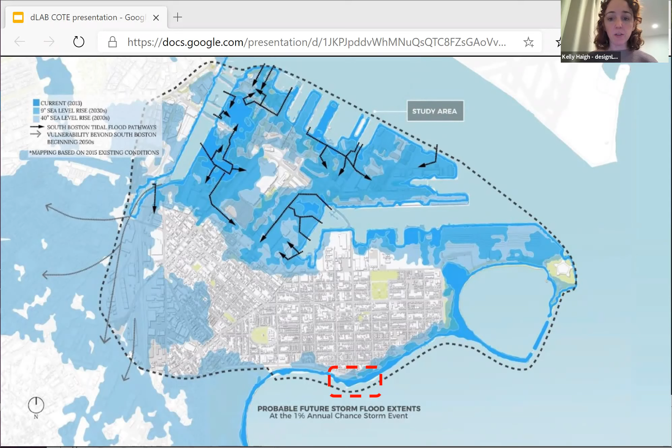So just a quick overview, there was a lot of nuance in starting to deal with resiliency, both the fact that we were right up against the water and also that we had 3 different elevations. So we needed a slightly different strategy at each section of the building. In the end, we did a combination of both wet flood proofing and dry flood proofing, with slightly different targets and technologies along the length of the building.

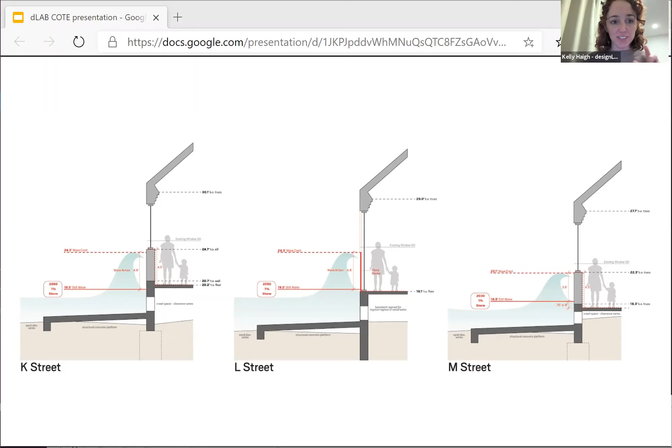And just scaling this out to the section of the building so we can start to see how the sustainable and resiliency goals start to dovetail with other issues like equity and accessibility. We have a section through the building, which you can see originally separated the lobby from the beach through this private gender-separated locker room.

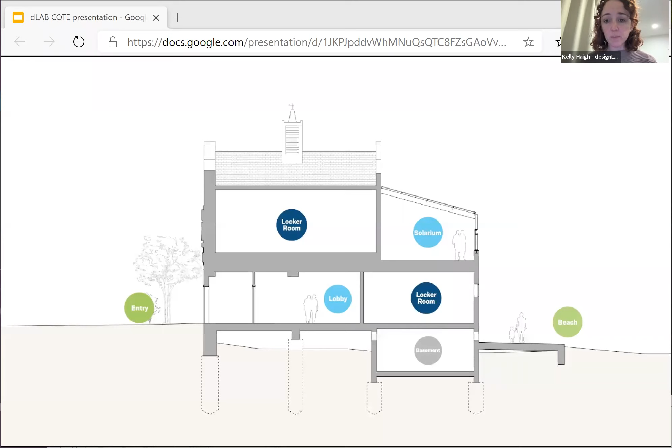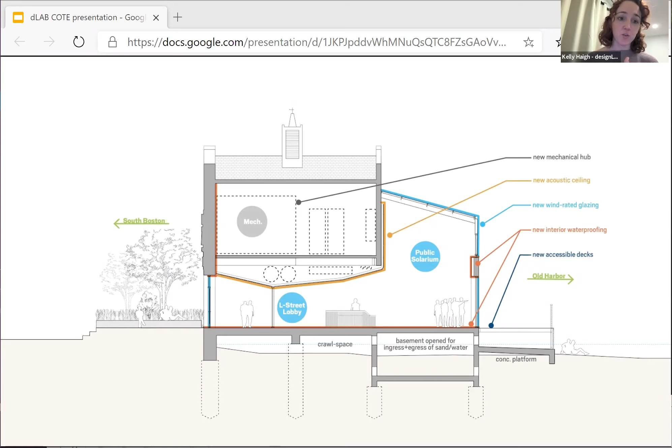Our proposed design, which is currently in construction, moves all the mechanicals up out of the flood zone. It really opens up the lobby all the way to the beach and allows all members of the community, regardless of age or gender, to use the same beaches together.

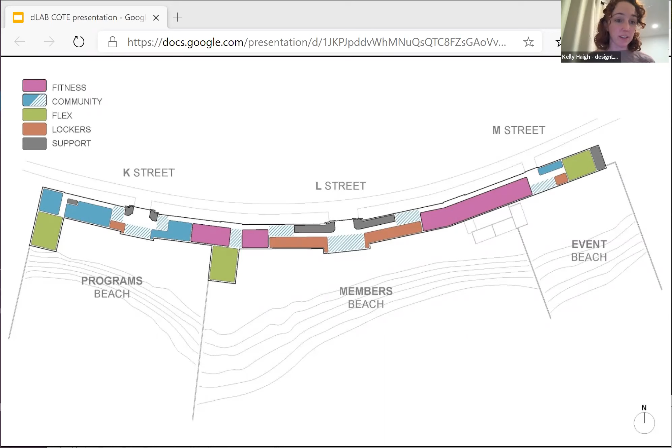The general organization remains the same, but we are starting to separate the beaches by program rather than gender - so programs beach and programs off of K Street, the primary members beach at L Street, which is the largest, and just an events beach at the smallest.

And of course making new plazas that are accessible and inviting, that create moments along Day Boulevard for the community. So just a couple of images of what the final proposal looks like.

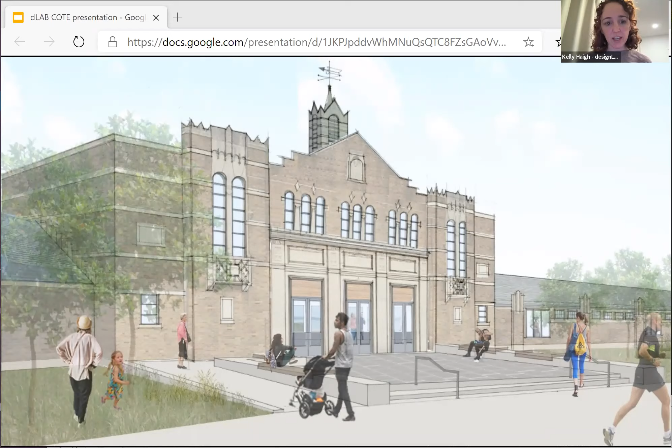This is from Day Boulevard. This is the L Street lobby where you can see we've opened up the floor to have a 2-story solarium, just allowing people to move in and through. And finally, a series of decks at the beach side that again just allow everybody to come down and be at the beach together.

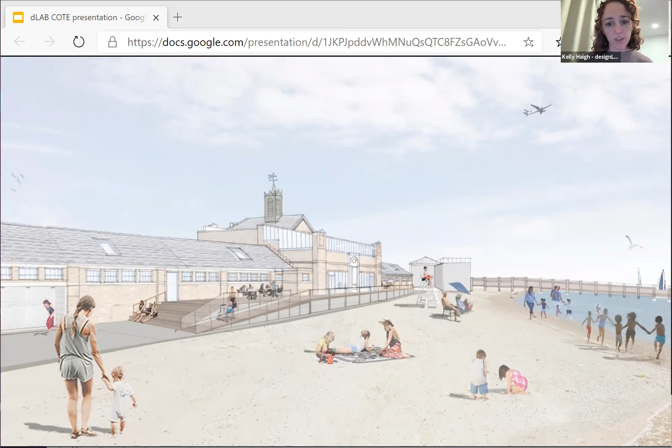So increasingly, we've been doing renovations of mid-century buildings also. This is a distinction between the sort of historic renovation and the more mid-century renovation, which has its own unique set of challenges and ideas.

We've done renovations of buildings from the 60s, 70s, and 80s, and what's unique there is a lot of these buildings are really built more on architectural ideas and theories rather than more formal stylistic rules. So it allows us a broader level of interpretation and intervention.

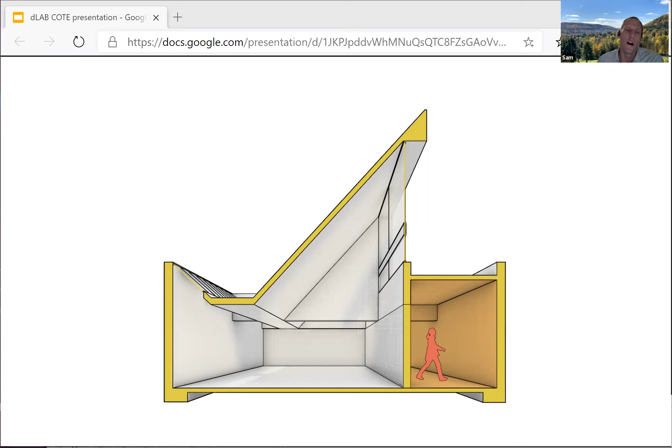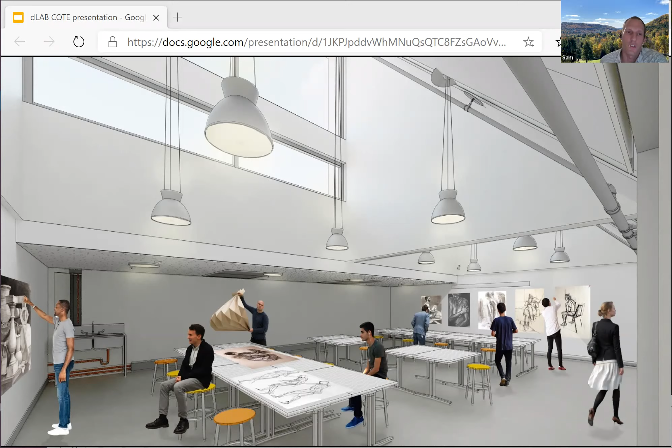Because the hallway was essentially this 600-foot windowless corridor, we actually flipped it and put the hallway on the south side, bringing natural light into that, which allowed the classrooms to maintain the large south-facing clerestory, while using the windowless bay as either storage or more utilitarian space within each classroom. So each classroom has this character which maintains the large clerestory windows while having that lower ceiling area. But then the hallway has this continuous skylight all the way down the length of it.

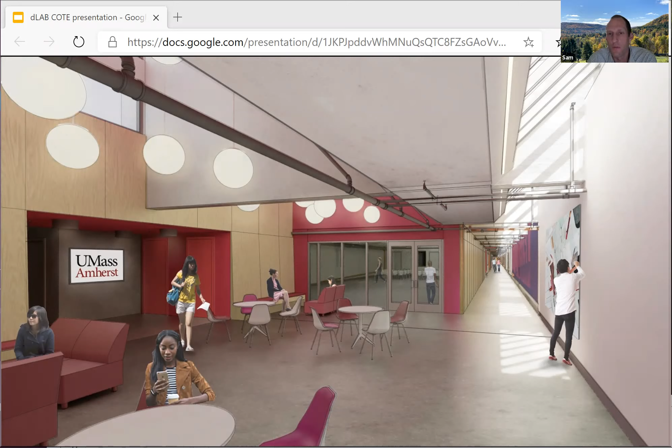One benefit is also that crossing the bridge to get to this hallway necessitates that at each entry point where the stairs are, there is a common area that allows you to orient yourself and pause through the length of this project. So what's been interesting to us is making an assessment and, ideally, improvement on the original concept of this bridge, while still maintaining some of the really beautiful characteristics of it at the clerestory.

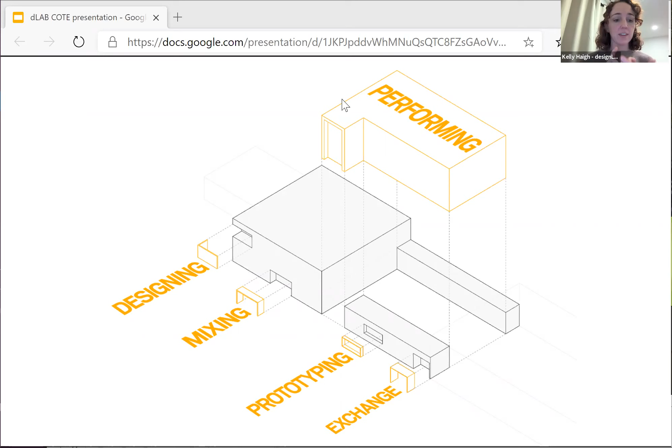Painting it all one color and starting to cut in holes to express the work within. So this is the final composition. We had an addition pop up to the center that was the performing space, and around it all of these openings that started to show various pieces of the process, like designing and prototyping and things of that nature.

Since we insulated the envelope, we actually lost a lot of the existing grit that I think really spoke to the theater programs. But we did have this wall that separated the two volumes of space that could remain open. So this really became the feature wall of the project, where we could celebrate the layers of history of the building. We located our primary stair there, and this was all about expressing the utility and history of the space.

The last context, and the one the project will spend the most time on, is this idea of the agrarian context. The Hitchcock Center is a project in this context, but again we've done a number in this vein, from the headquarters of the IFAW to some work for the Trustees of Reservations.

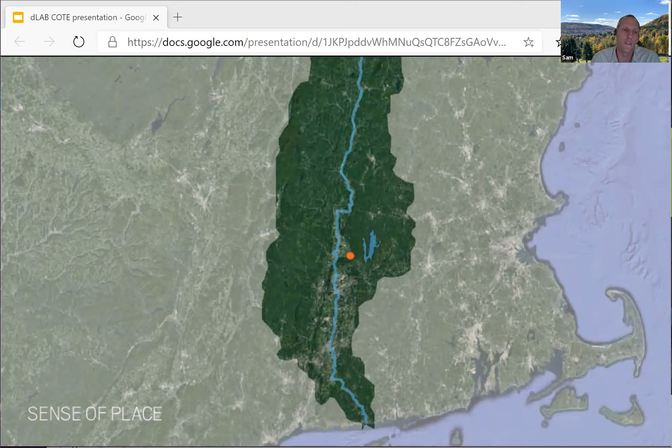I should say that, as was mentioned, this is a Living Building Challenge certified project, so it had that overlay on top of it. Happy to talk through any of the more technical aspects of that in the Q&A. But for us, it wasn't really a driver so much as it was one of the tools, one of the levers and advocacy channels that we used throughout the process.

There was an existing hayfield actively hayed by a neighboring farmer. It had a remnant orchard that was at one point a commercial apple orchard, but had become overgrown and gone fallow. There was this seasonal wetland, actually a vernal wetland because it's at the top of this hill, a successional meadow, and then this open meadow. And so that all ultimately became really core to the planning of the building.

One of the major drivers for the building's planning was this idea that they wanted to have 2 school groups outside playing that would not interfere with each other. So the whole building was set up with offset axes to create these 2 outdoor play spaces, which we called the den play area and the nest play area.

Again, here, this was really trying to bring awareness to the environmental context in which they were operating and the different factors that affected them. So the nest play area is south facing. It's a lot brighter. Because the hill falls away, the building is kind of set up on the landscape, and it's a drier, sunnier space.

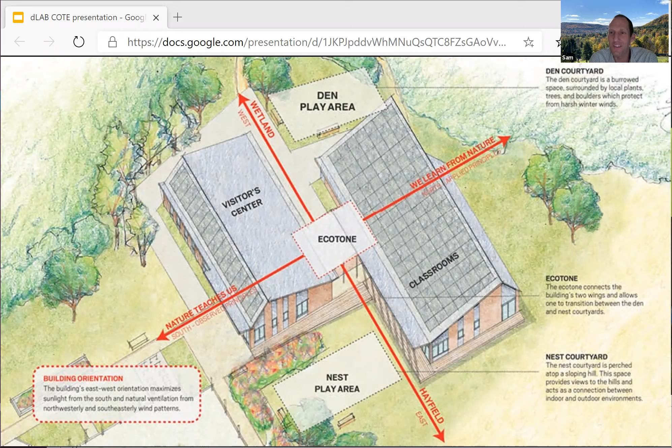If you remember from that axon diagram, the building had a north wing and a south wing. The south wing is the visitor center component and is really about observed principles of nature. And the classroom section on the north is really about applied principles of nature.